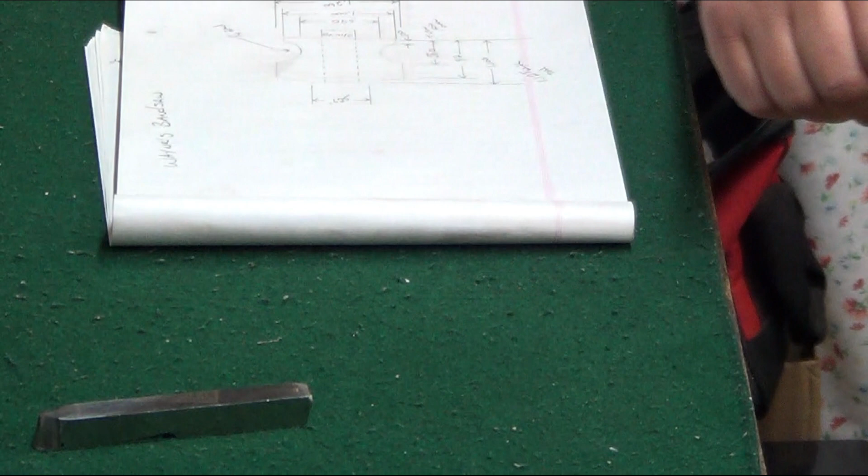Alright, like I was saying earlier, we're going to be making a couple of these knobs for my nephew's bandsaw, and all they do is hold the shield on around where the wheels go for the bandsaw. It's a 14-inch Delta, it's an antique. It's missing a couple of these knobs, and you can't buy these anymore.

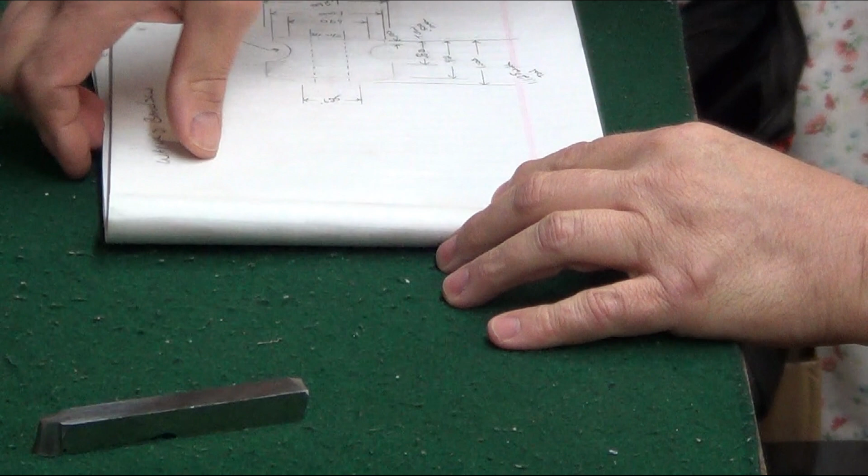Okay, so I did already make a couple. This is what they're going to look like when they're finished. Prior to making it, I came up with a blueprint, and we laid out all the different dimensions that we need to follow in order to make these knobs.

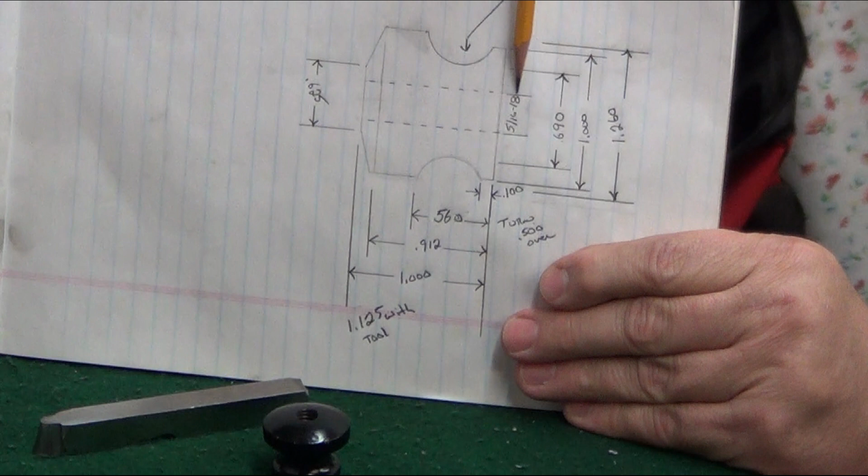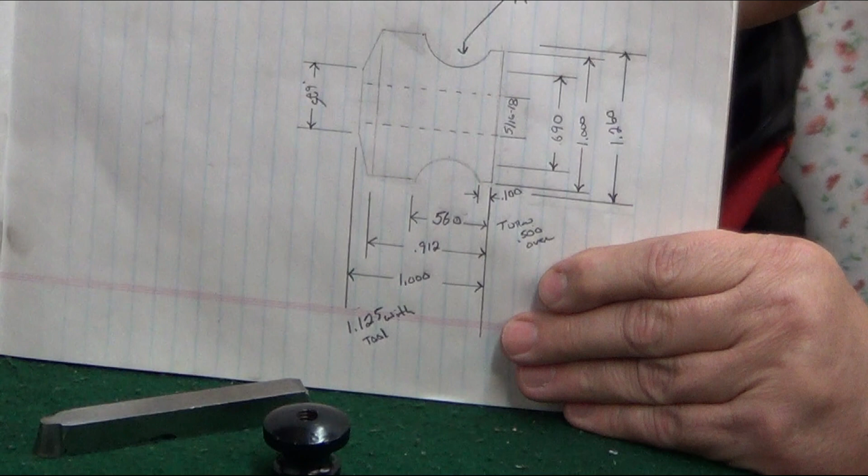Now, it's all lathe work, no milling work, so it's pretty straightforward. It's not a very hard job at all, and because these are knobs, there isn't any real critical dimensions. Probably the only thing that's critical is the 5/16-18 threads that go on the inside to make sure they screw on the shafts that come out of the shields. But other than that, it's plus or minus a few thousandths. It's not a big deal. So it's a relatively simple process.

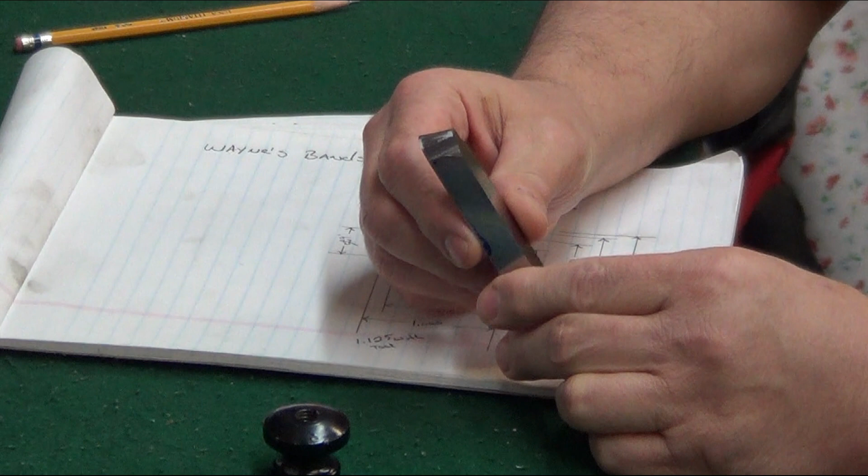The only thing special that we're going to need is we need to make a radius cutter. So I made this radius cutter. It's right around a 1/4 inch, so that we can make that nice little feature right there.

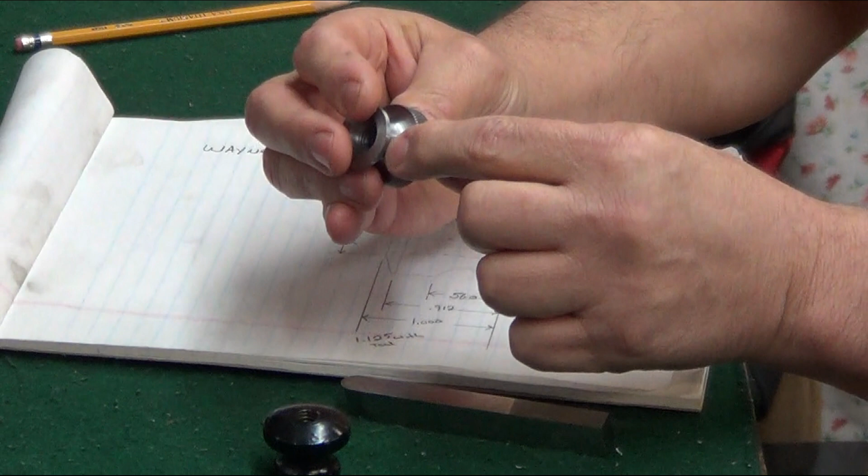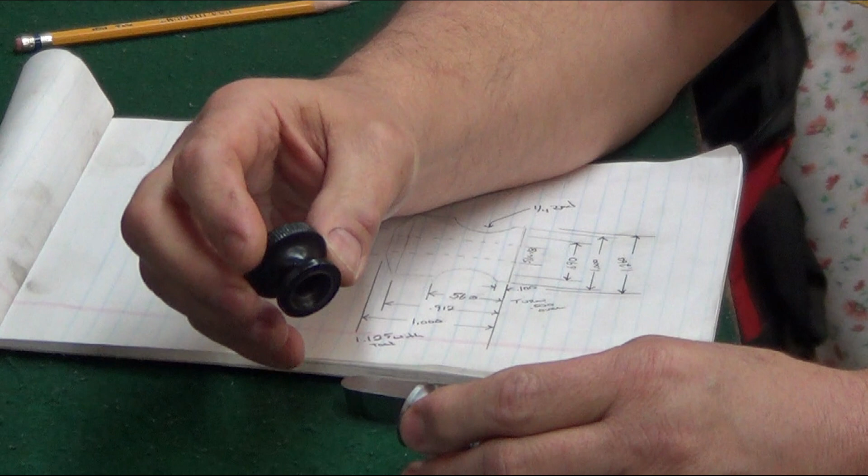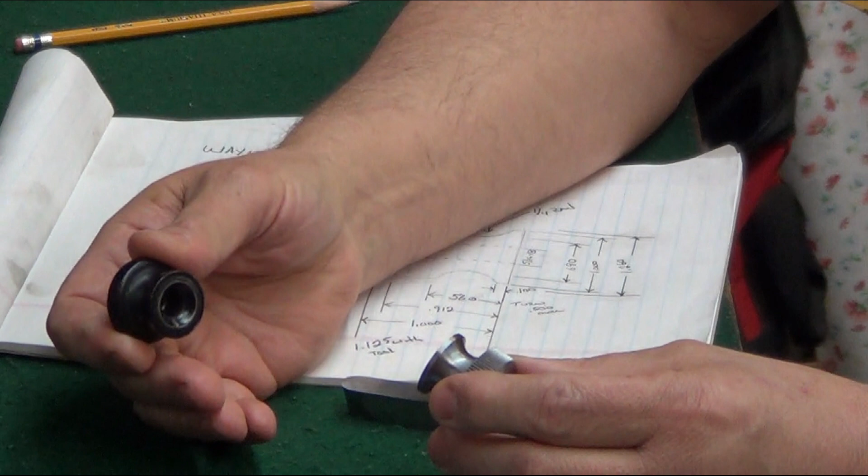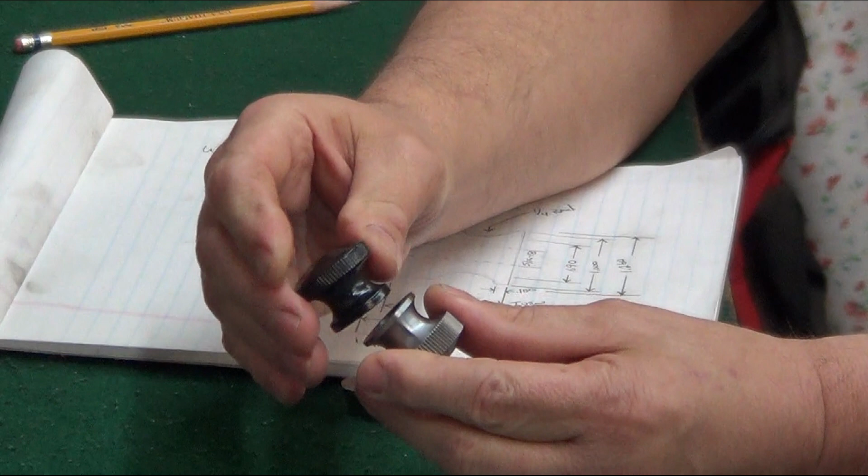Now the knobs that are on the bandsaw that I have, because I have a pretty similar bandsaw, they are all different from each other. They have the same style, same shape roughly, but some of the dimensions are a little bit different. So I took one of them and we're going to copy those. Mine will be a little bit more the same, they will be done all on the same machine, one right after another, so they're going to come out a lot closer than the other ones. As you can see on this one, this might be a little bit narrower than this on mine, because the one that I copied was a little bit bigger, so they will come out a little bit different than some of the ones that are on my machine, but like I said, mine are all different.

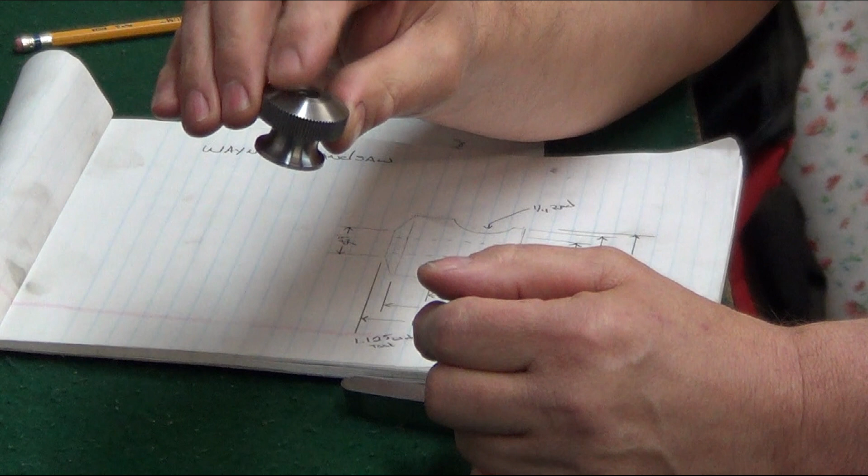So this is the project. It is a Christmas gift, so we're going to go over to the lathe, and I'm going to show you how I make one of these. Okay, let's get going.

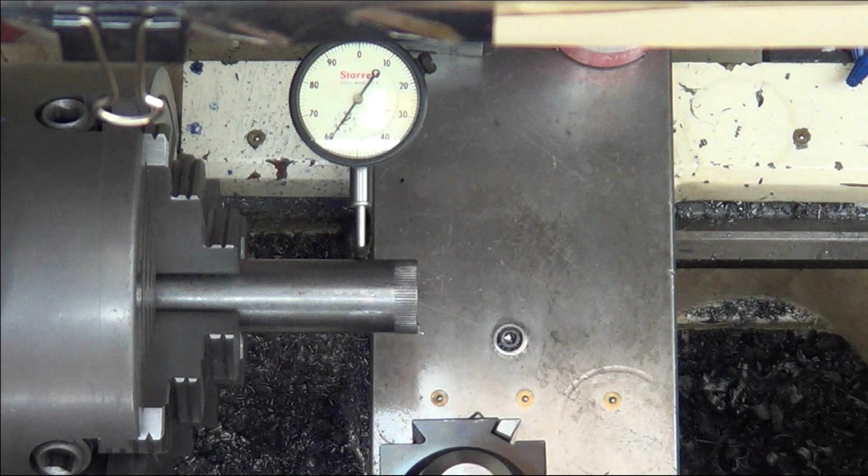Alright, so here we are over at the lathe. First thing we're going to do is zero the work in the chuck. This is a 4-jaw chuck, so it is not self-centering. As you can see with the dial indicator, it's moving around. This doesn't have to be perfect, but we're going to bring it pretty close. We got to get this so the needle reads 0. So when you go around in a circle, anytime the needle moves in this direction to the right, it's high, and as it comes around it goes low. So we're going to keep going back and forth until we get the piece of work centered in the lathe.

So we'll start with our number 1 and 3 jaw. We'll put this pretty close to 0, and all I'm doing is moving my infeed on my carriage. What we want to do is split the difference. So if this right now is 60, that means this side is too far out, so this side has to come to me. I'm going to loosen this up, and tighten this side. I want to get it to roughly the 30 position.

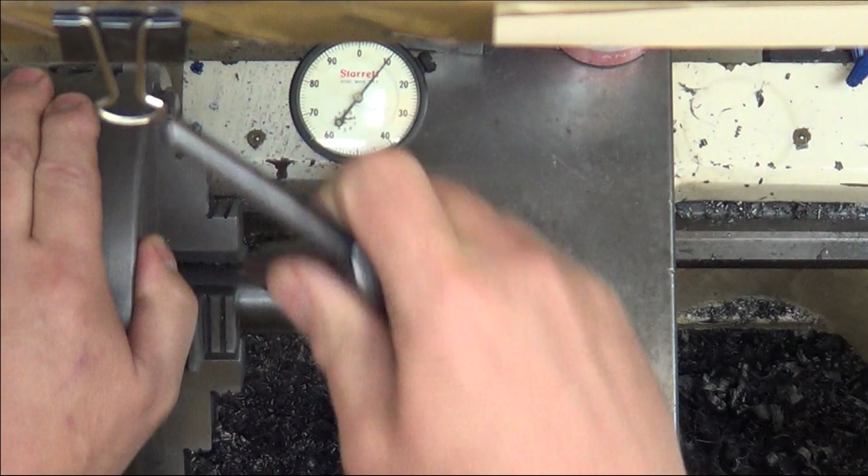Much closer. So come back over here, set it to 0, and we're about 15 out, so still I'm going to split that difference. Oop, I think that's going to be too much. Let's see what happens. Actually, it wasn't too bad. So we're at about 5.

This would be easier if the indicator was on the other side. So we're about 3. Alright, see what the 2 and the 4 is. 2 and the 4 isn't too bad either. So that side has to go this direction.

Pretty close on that one. Oh, a little bit more. That one's pretty true. And that one's going to come up to about the 0. I'm going to have to loosen this up just a little bit.

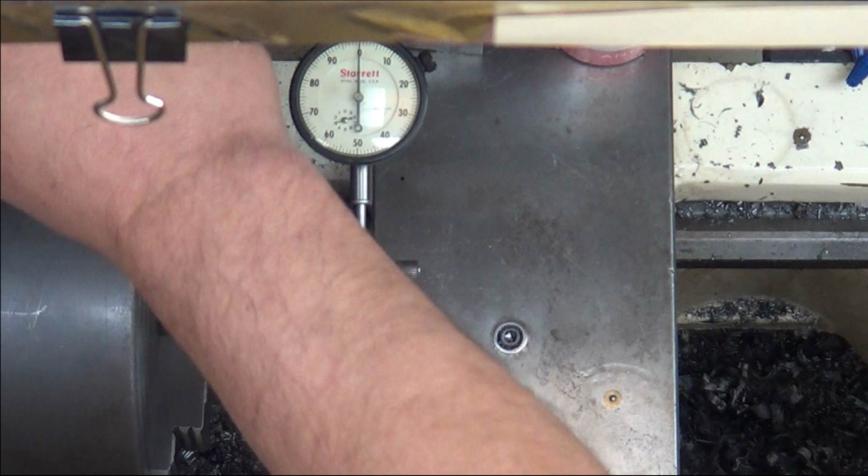Alright, so this one's a little bit high. Still a little high. I went the wrong way. I did, I went the wrong way.

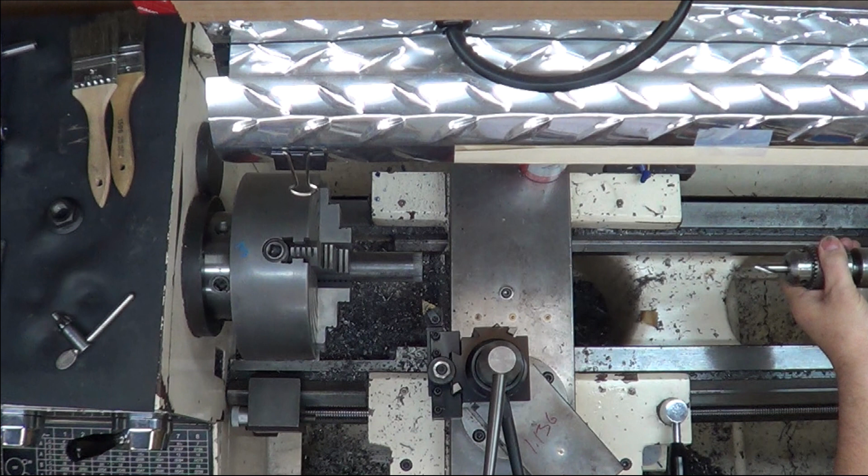Alright, so we're going to take the drill chuck out. Put the center in.

And the reason for this is we're going to put this knurl on here, which means we're going to put a lot of force on this. We want to hold this from flexing. Alright.

Over here, get our knurl, and we may have to go back a few times until we get the depth that we want, because what this is going to do is it's actually going to squish the metal and it's going to expand it.

Okay, now this is actually a straight knurl, where most people look at a knurl as a diamond. This is actually a knurling tool that my father had made when I had my automotive machine shop. We used to knurl the guides in the aluminum head so that they wouldn't slide through. A lot of the cars had issues with them sliding down.

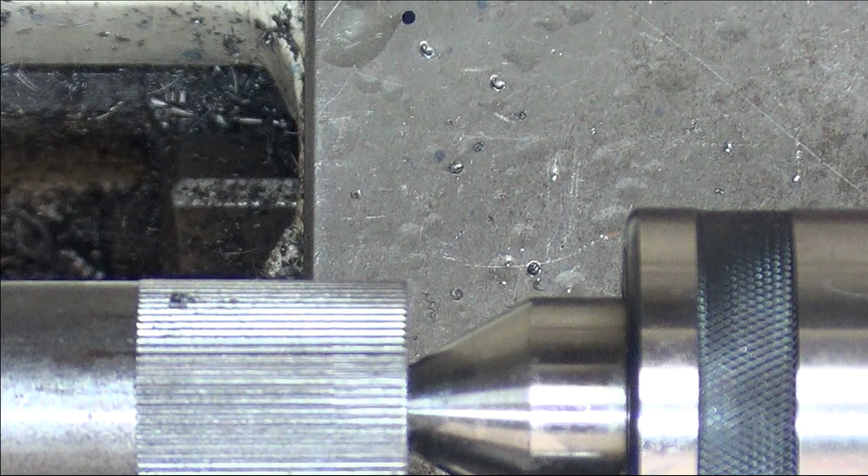A little bit wider here, but it cleans up nice right over in this area. That does not look bad. I may let it run back one more time. I'm going to reverse the feed. Lube this up really good.

Disengage, and we're going to turn our feed back the other direction. Alright. That looks good. Clean that up. That's all done. Double check, we're well within the area we need it.

Alright, so the next thing we're going to do is we are going to turn this OD right here, this outside diameter, and we're going to turn it up right about to here, so we're going to relieve some of this area where we're going to put the radius in. But we can't turn right up to here because we need meat in here, we need steel, so that the radius will blend.

So let's take this stop off. Get this stop out of the way. And we're going to put a dial indicator in here.

We're going to put a mag dial indicator down here on the ways, and hopefully I got enough room to do this. I believe I do. So I'm going to start off with a roughing tool, which is this one right here.

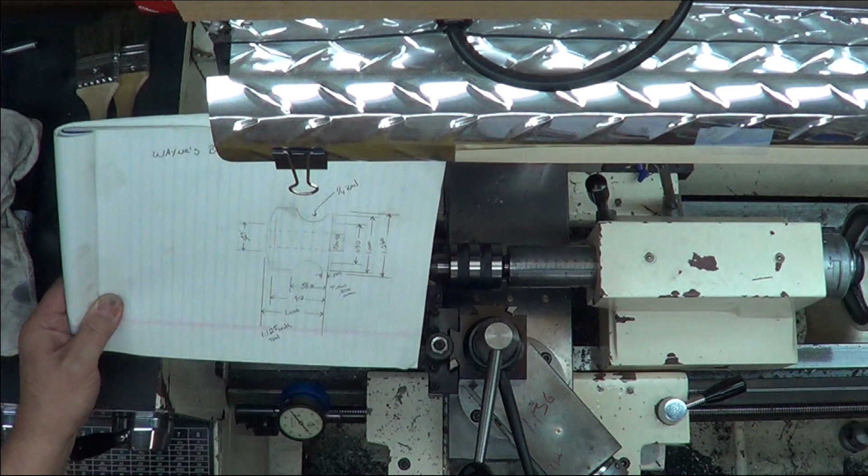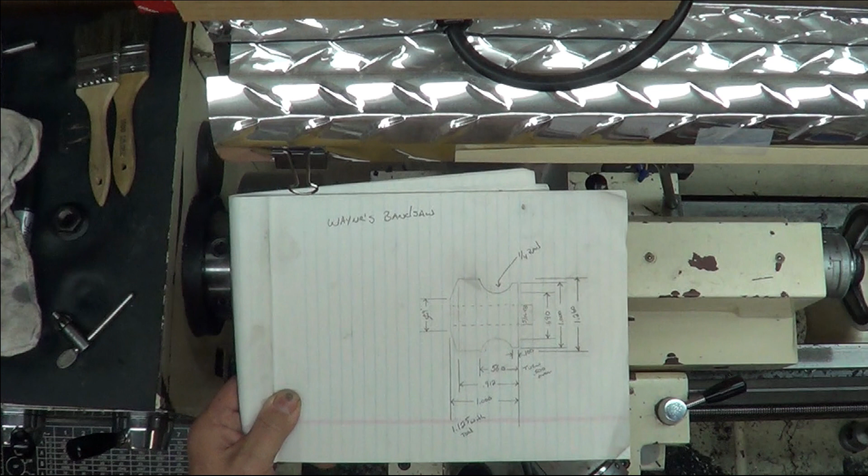Now, grab a pencil. You guys can see this. This spot right here is 560 thousandths from the end. So I left myself a note to turn over to about 500, give or take. And so I'll turn over to here at this size, and that'll give me enough to blend when I put my radius tool in. So that's the first thing I'm going to turn, is I'm going to come over about 500 thousandths. Okay.

This is a 50 thousandths dial indicator, so I'm going to have to go 10 revolutions to come in where I want to go. So that's my zero. I'm going to go 1, 2, 3, 4, 5, 6, 7, 8, 9, 10.

Now, just to keep us honest, I'm going to take a quick peek at that, and we look pretty good. I just want to make sure I'm not going further than I'm supposed to. So I'm going to move this back, and I'm going to put this on zero. So when I come over to there, I know I'm close. That's just a rough.

I'm going to put a mark in there also. Nope, I got to change my speed. Let's see, HLM, let's go with H. L. M. See how that looks. Now we're going to go faster than that.